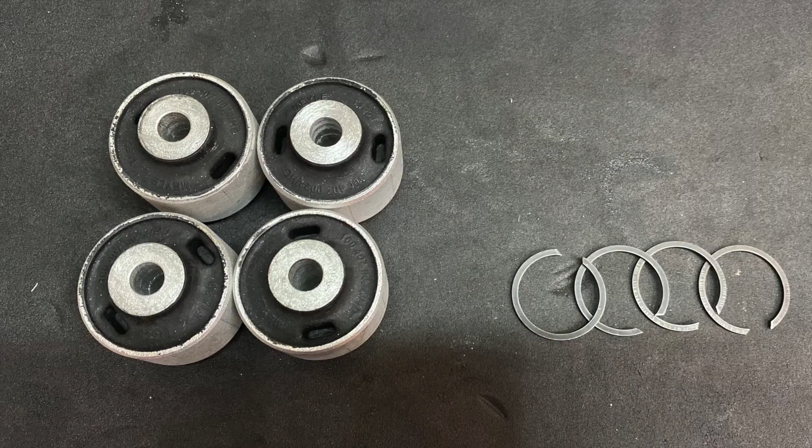This time we're going to look at the riveting world of bushings, specifically the wear-prone upper control arm bushings at the front. Audi must consider these normal wear items as they're an issue across the entire line from the A5 to the RS5 as well as the A4 cars. Why is that? The main culprit is the bonded rubber bushing. Sexy. Each has a void that can only be deflected so much. Eventually they all tear as a result of the design and the increased weight over the front wheels. Think of it as a 911 in reverse.

I like to enjoy the car, and I particularly enjoy it on the back roads of Mexico. You know the spot. I usually can be seen with my computer in tow, logging various parameters and collecting data for analysis later on. One thing I've noticed in my time there is the concept of billiard smooth doesn't exist here, and apparently neither does camber. The only thing these road pavers understood is negative camber. Makes it pretty interesting. Nonetheless, compliance is an important factor in going quickly and comfortably. The original bushings have plenty of give and keep road noise to a minimum.

With that said, let's go off the deep end. After experimenting with exactly one polyurethane bushing for the last 2 years, I decided to go all out and install a set of race bushings. These are fairly high on the durometer scale and are listed for track day and race cars. That's all well and good, but I'm replacing a total of 4 bushings. I can't imagine they'd be all that bad.

One issue poly bushings have is they tend to squeak. Sooner or later. They always will, and there's no way to avoid it. I experienced it with my single poly bushing, and it sounded like a squeaky spring, which is just the sort of sound you want everyone to hear coming out of your RS5.

I did manage to put that noise off for about 2 years with the help of a wonder lubricant called Krytox. This stuff was invented for NASA, and it really is sexy in a bottle. You'll pay for it too. It isn't cheap. As they say, a little goes a long way, so don't let the small bottle scare you. I use it to lube just about everything from squeaking bump stops to the aforementioned poly bushings. More on that later though.

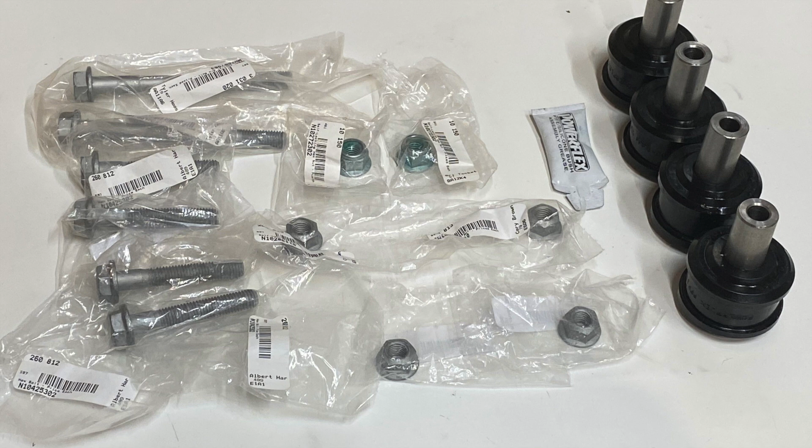With that said, there are a few basic items you'll need, including new bushings as well as a full set of replacement nuts and bolts for the control arm and the pinch bolt in the suspension upright. New bolts are mandatory, being one-time use, torque to yield, or stretch bolts. Do not overlook this step. You can source them individually by part number or purchase a kit with the necessary bolts through a company like ECS Tuning. All told, you'll have 6 bolts and 6 nuts, and the cost is just under $50 for the set.

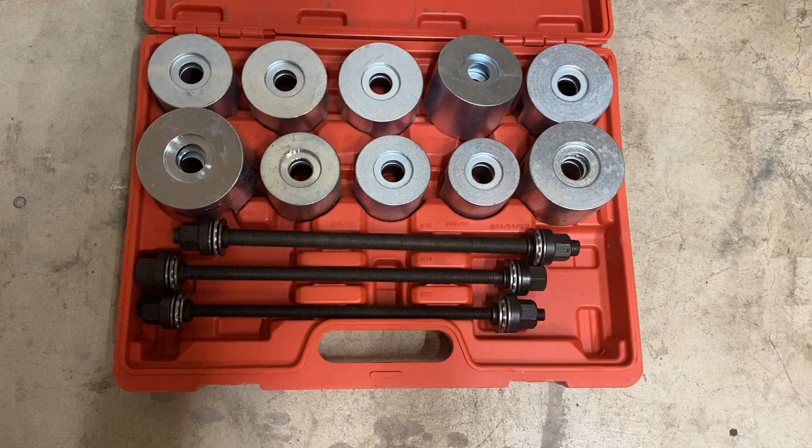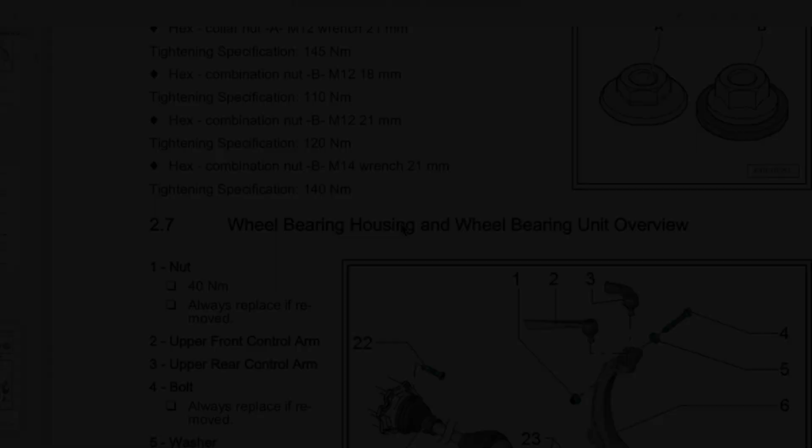In addition to those, you'll want a good set of wrenches, particularly 16mm, along with a torque wrench, metric sockets, a jack, impact gun, jack stands, a bushing removal kit, and a very loyal dog to manage you as you work. The bushing removal kit can be found on places like Amazon, and it makes the whole process fairly easy. If it is your first rodeo, a factory service manual is also a really good idea.

You'll begin by jacking the car up on either side and placing your jack stands in the appropriate place. With the wheels removed, you'll have full access to the control arms, and there's a fairly good amount of room to work with. One tip, remove the suspension strut tower cover in the engine bay and point a work light through it. It'll increase visibility and make the job that much easier.

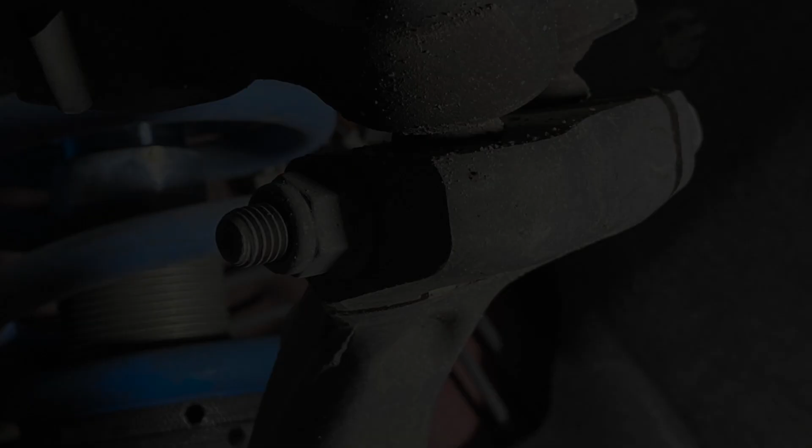What we're looking at, besides a very dirty wheel well, is the removal of 3 sets of nuts and bolts per side. Honestly, it's fairly simple. Remove the suspension upright pinch bolt first. These are torqued down at a very low setting, so they're very easy to get off. With the nut removed, you may need a screwdriver or punch to push the bolt all the way out.

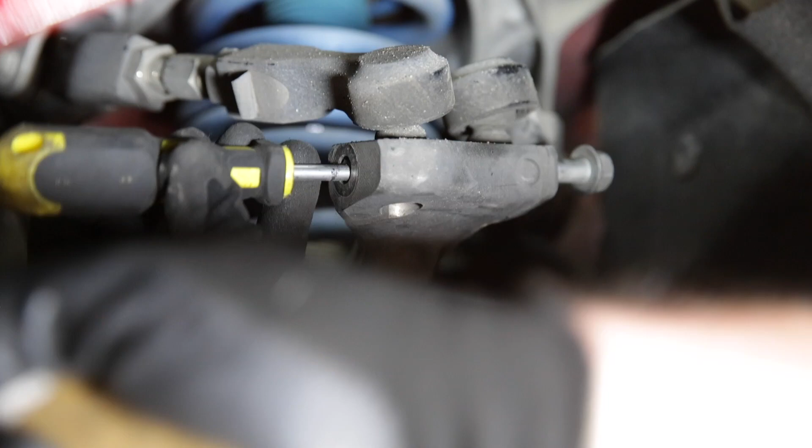The inner nuts on the upper control arm are also fairly easy to remove. No 3-foot breaker bar needed. They may take a little bit of effort, but you'll be able to get them off with just hand power. Depending on how the spring windings sit, the bolts may be super easy to get out or somewhat difficult, but

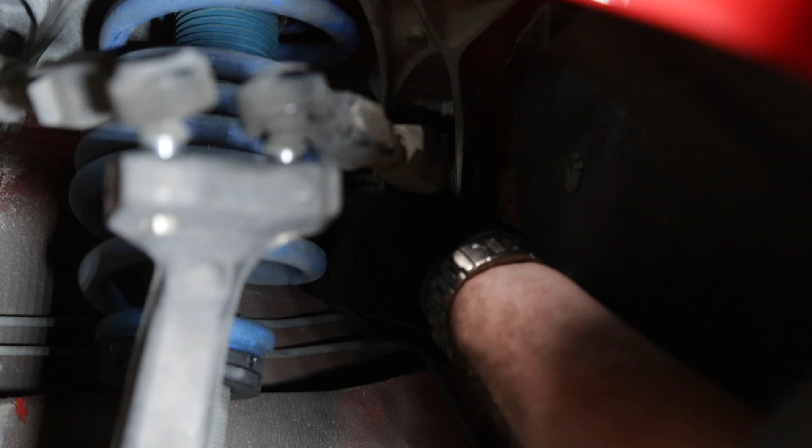they will come out. If that isn't the case, removing the 4 strut tower bolts and lowering the entire assembly may give you a bit better access. I'd only do that as a last resort. Truth be told, it'll take you half an hour to remove all 3 bolts on one side. It'll take you 4 times longer to get them back in.

You have been warned. As I said, this task isn't overly difficult, but it can be a test in frustration management. Sometimes the alignment of various items makes it much harder than it has to be. With everything removed, you'll rinse and repeat on the other side.

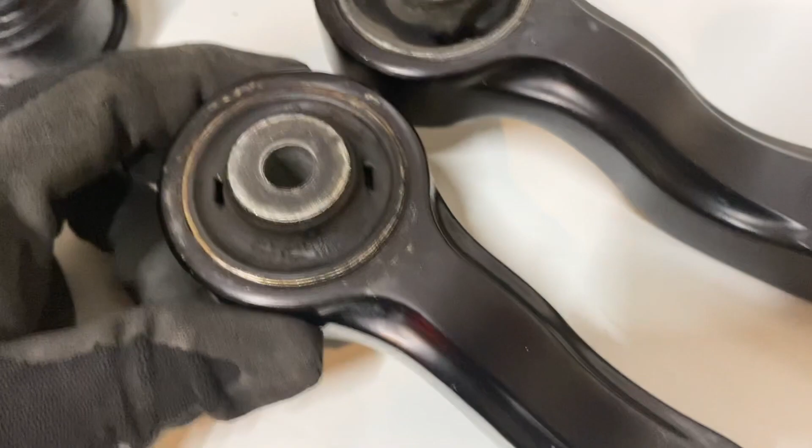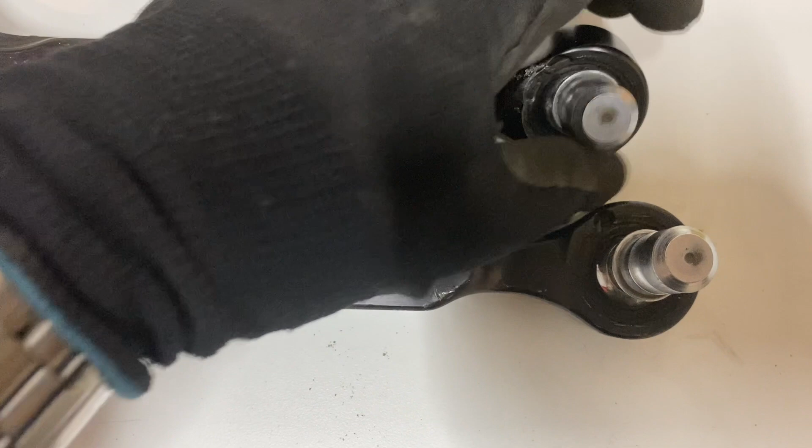Looking over the bushings, almost all of them had small cracks in the rubber portion. Some were better than others, but the car will benefit from having all 4 changed. One surprise I did come across were the outer spherical bearings. I hadn't even considered these may be bad. 2 of the bearings were, both on the trailing arm, which is quite interesting. The leading arm on both were fine.

Regardless, I ordered a full rebuild kit from Pure Motorsports. It's less expensive to buy the whole kit rather than the outer spherical bearings separately.

So if anyone is looking for 4 OEM-style inner bushings, hit me up.

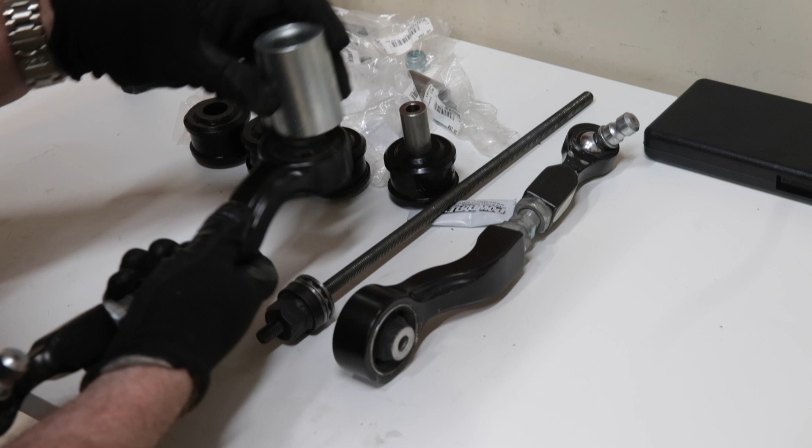To remove the bushings from the end of the control arm, you'll need a bushing removal kit like this one I'm using. It consists of 2 cups, one larger than the bushing and one slightly smaller than its outside diameter. You're essentially pressing the bushing out and into the larger cup. It's a bit like a jigsaw puzzle at first, finding the right cup size and assembling everything.

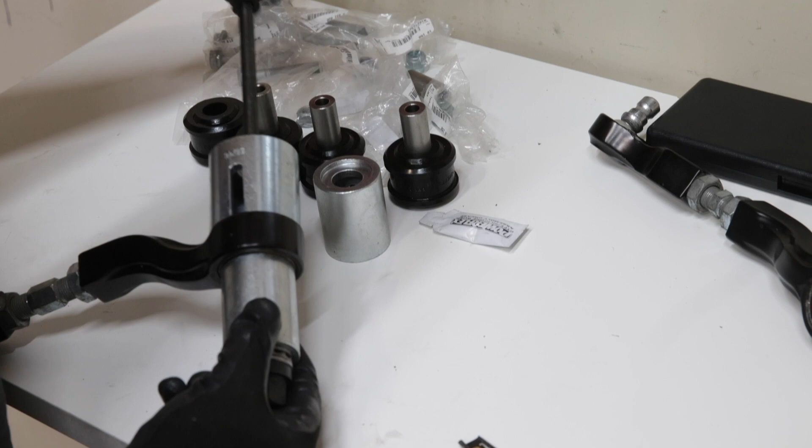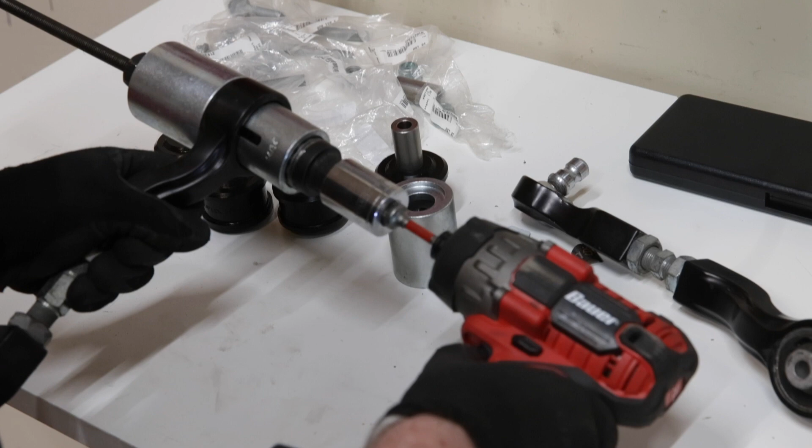The kit I have is a cheap version from China with horrific ball bearings which tend to disintegrate fairly quickly. Just lube everything up and you can forego the bearings if need be. Alignment is fairly critical, so just take it slow until things start to move in the right direction. And yes, they'll slingshot out the end. I usually do this on the ground, but I did it up high for filming reasons. You're welcome.

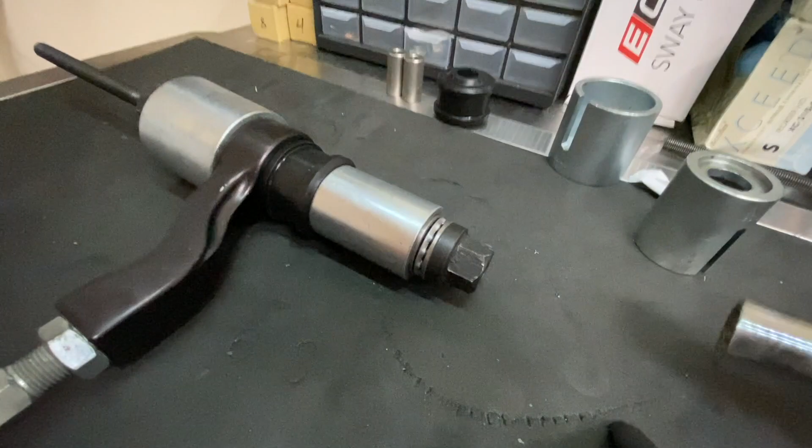The next big challenge is getting the new poly bushings in. These are from Powerflex, which I believe is a UK-based company. They have 2 different offerings, the purple street version and the black race version.

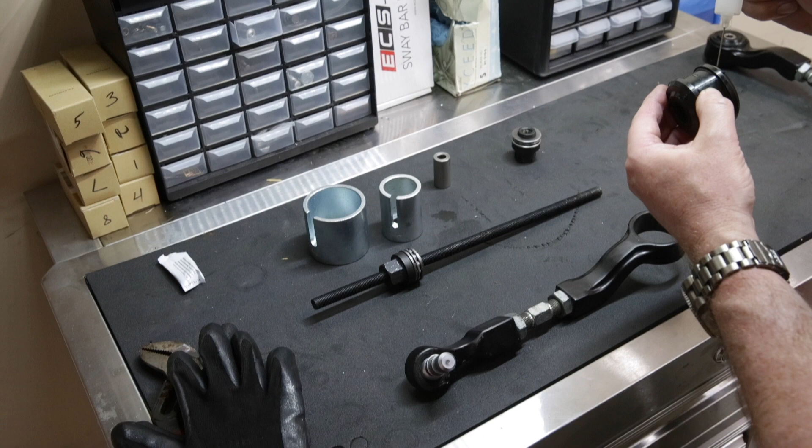Getting the oversized bushings in is a bit more difficult and a bit of a balancing act. Powerflex advises to start them in at an angle, stating the rest of the bushing will then slip in. Sure enough, it worked. I did lube everything with a bit of that magical Krytox stuff though. I ended up using several different cup sizes on the receiving end to get the bushings to fully seat with both outer lips positioned on either side of the control arm. This took a bit of patience at worst.

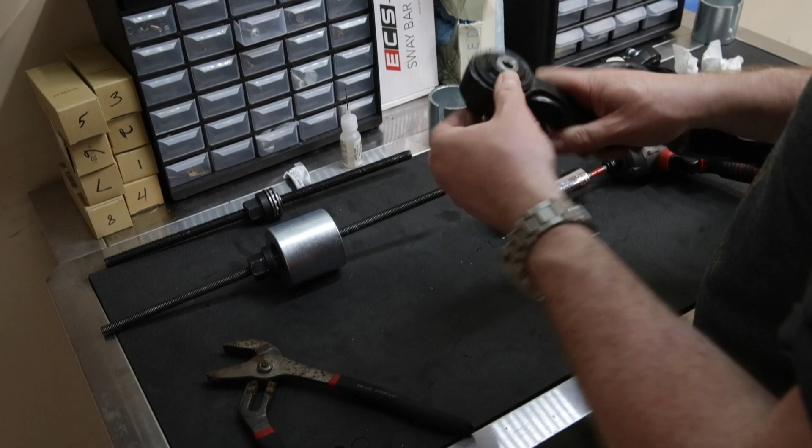I also used the cups to install the steel center bushing. I made sure to lube up the center bore of the poly bushing, filling the waffling with the included PTFE grease. The outboard Aurora bearings were the exact opposite.

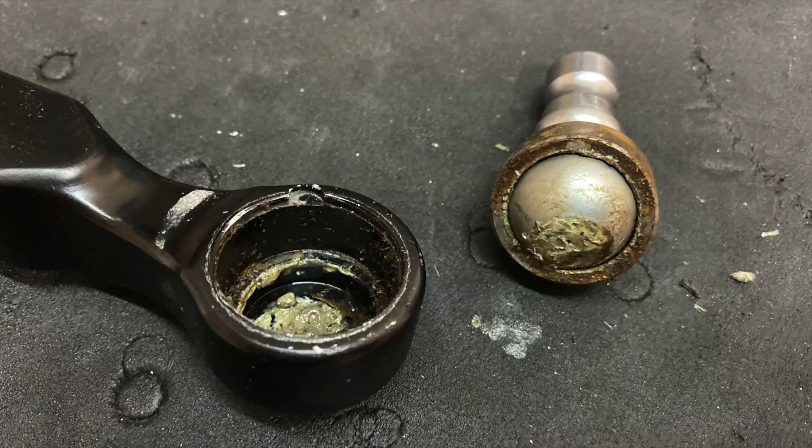While exactly one came out with a dead blow plastic hammer, the rest required PB Blaster, aka penetrating fluid, which I let sit overnight. Alternatively, you could try freezing the arms for a few hours to break the corrosion bonding between the 2 metal pieces. As the metal contracts, it will break that bond. But before you can actually remove the bearings, each are held in place by a constant radius snap ring.

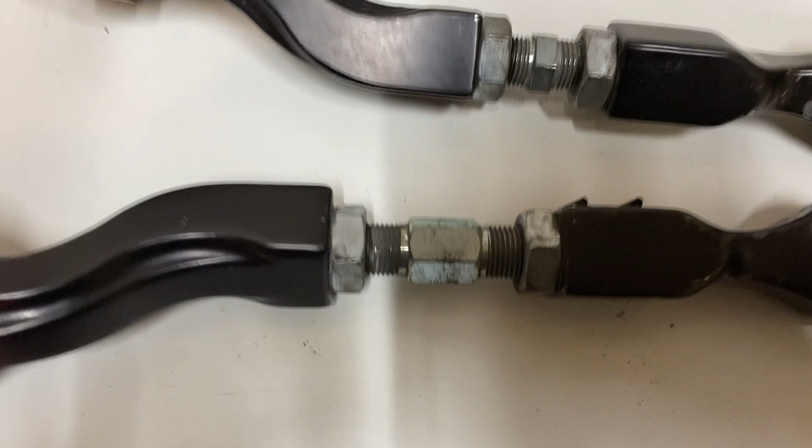Unfortunately, there are no small holes for removal, so use a screwdriver gingerly. These control arms have been serviced before, and whoever did the work managed to scar them up. As I mentioned before, after removing the snap rings, I doused them in penetrating fluid and let them sit overnight.

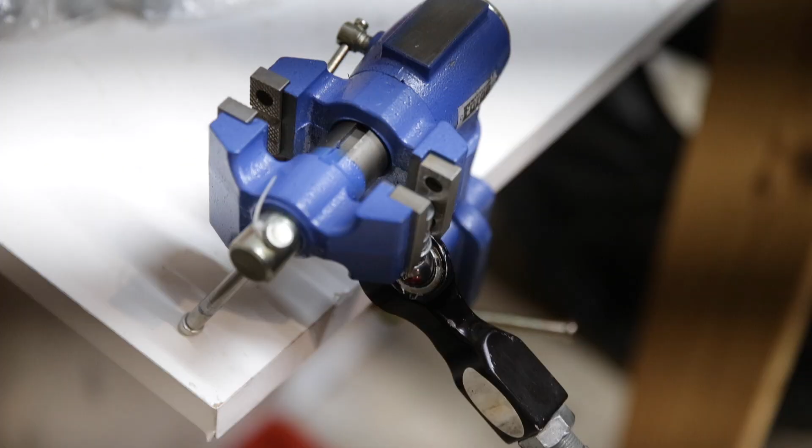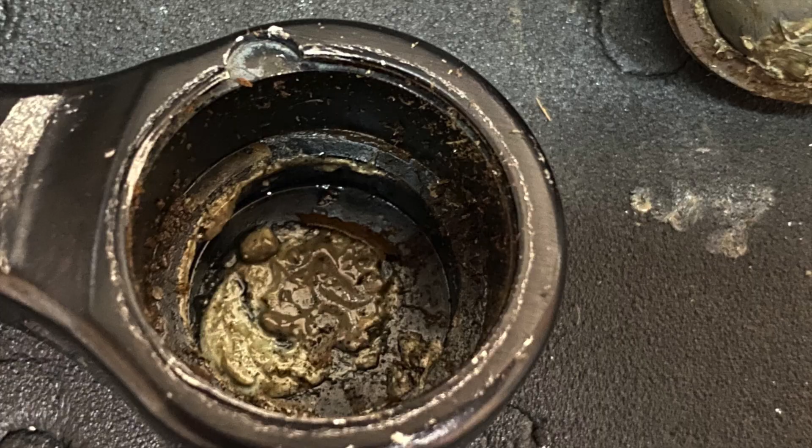The next day, I placed the nose in a vise and gave it a solid love tap with a dead blow hammer. After disassembly, I found that someone had added a good-sized dab of grease. This is actually something you do not want to do, as the petroleum-based grease can wear down the inner Teflon lining of the bearing. These bearings are proprietary and made by a company called Aurora. They're about $45 a pop.

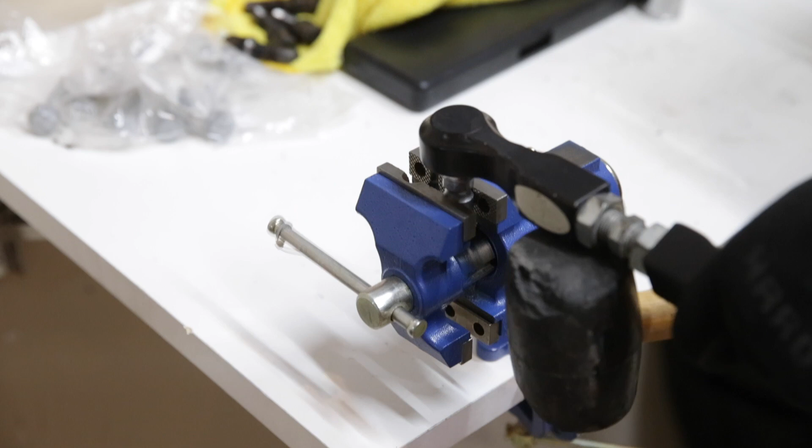The freezer trick I mentioned earlier can be used to insert the new bearings. By freezing them, they contract to their lowest possible outside diameter. Make sure to clean the receiving cup on the control arms thoroughly. With the new bearings nice and cold, you can press them in gingerly with the use of a vise. Work your way around the radius until it's fully seated. With the bearings in place, install the snap rings and you're good to go.

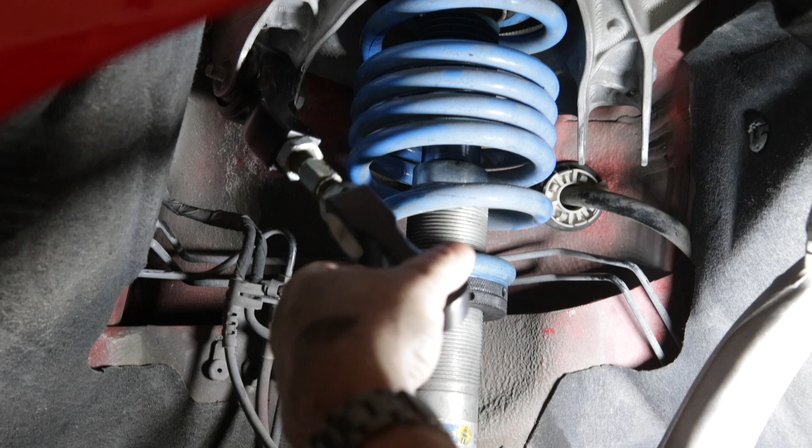The reinstallation process will take a zen-like patience at times. It can be difficult to line everything up to make the bolt insertion easier. I ended up using my camera phone to see if the control arm bushing center bore was aligned with the holes in the chassis mounting tabs. The springs being in the way compounds the issue, and I found it necessary to lower the spring perch and afford myself more room to align the bolt correctly.

Strangely, I did not have this problem on the passenger side. If you're still rocking the original suspension or lowering springs, your mileage and level of frustration may vary. One tip, don't tighten the inner control arm bolts just yet. Do so after you've installed the outer spherical bearing into the suspension upright.

The suspension upright pinch bolt setup can be a bit frustrating if you're stubborn like me. Ideally, one would simply loosen the jam nuts on the turnbuckle, allowing the alignment of both spherical bearing noses and easily pressing them into the upright receptacles. Both noses must be aligned perfectly parallel in order to push them into the upright.

I could have just marked the control arm's adjustable position and returned them to the original position after installing the pinch bolt. I could have done a lot of things, but I chose to keep everything as is. This perpetuated a lot of swearing, raising and lowering of the suspension, and even turning the steering wheel. Eventually, they went in and all was right in the world.

The pinch bolt locking nut is torqued to 40 Newton meters or 29.5 foot-pounds of torque. Not a whole lot. Strangely enough, the factory service manual does not list a torque specification for the upper control arm inner bolts. This means snug them good and tight with wrenches. This is especially applicable to the OEM-style bonded rubber bushings.

The suspension should be raised to ride height before tightening the two inner nuts. Using a solid point on the lower control arm, jack the vehicle up until it begins to lift off the jack stand. Tighten the nut on either control arm. The original bushings only have so much deflection, and failure to do this will result in premature tear.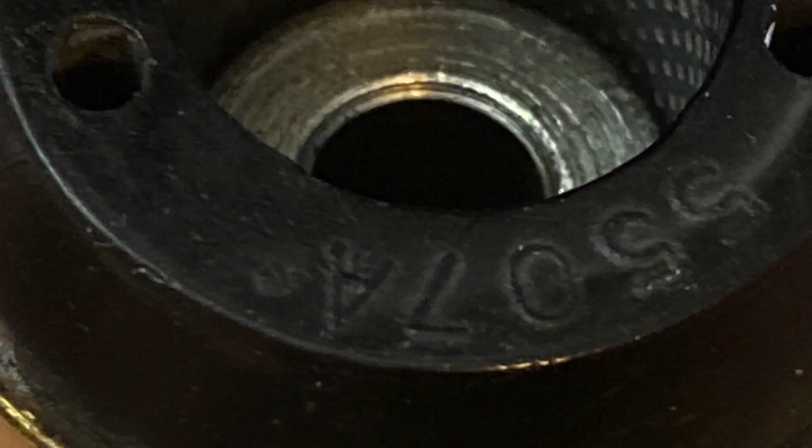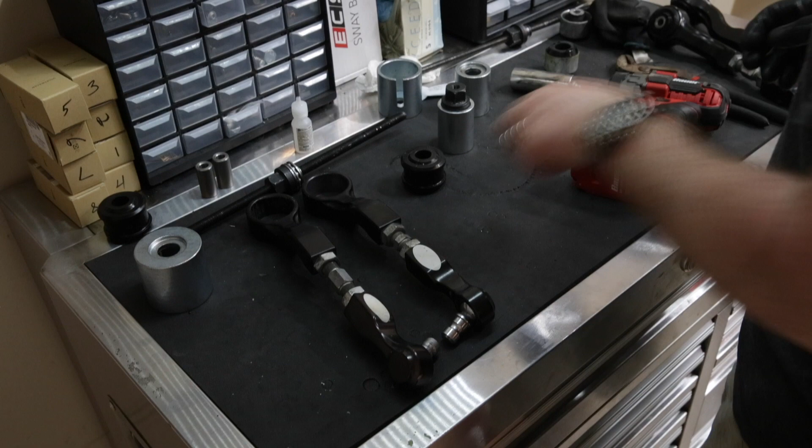Theoretically, the new poly bushings are free to rotate 360 degrees without tearing. Nonetheless, I did position the suspension at ride height mostly out of superstition. If there is one area which does wear on these types of bushings, it's the inner waffling as it rotates around the metal bearing. So how much time did this take?

If you're just replacing the inner bushings on stock control arms, give yourself about 4 hours to do this task. This is assuming you do not have to lower the suspension. If you're rebuilding everything as I did, add another 2 hours to be safe, minus whatever time needed for penetrating fluid and/or freezing your bearings.

Just to put a timestamp on this video, I'm currently not driving as much due to COVID-19. With that said, I have taken the car out since installing the bushings, and I can report my car turns as well to the right as it does to the left.

So far, I cannot detect any additional noise or harshness, and the car did gain a bit more precise just off-center steering reaction, something I find lacking in the RS5. I will of course have updates in the future to keep everyone informed on the viability of this mod.